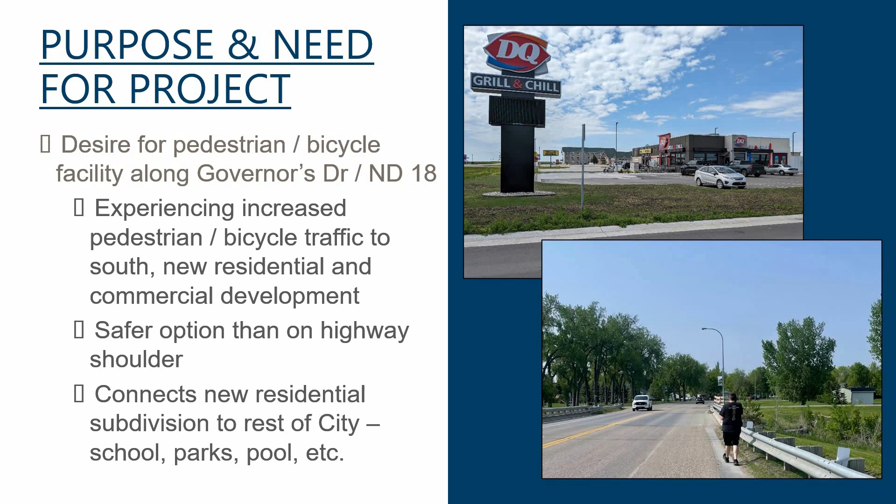This project, especially the bridge, connects the isolated new subdivision to the rest of the city's amenities, such as the school, public parks, and the pool. The project consists of a path along Governor's Drive from 37th Street Southeast to Cottonwood Drive. The planned route is shown to the right and crosses on the north between Cottonwood Drive and Morningside Drive, a pedestrian bridge over Swan Creek along the current highway bridge, and a crossing to the south near 37th Street Southeast.

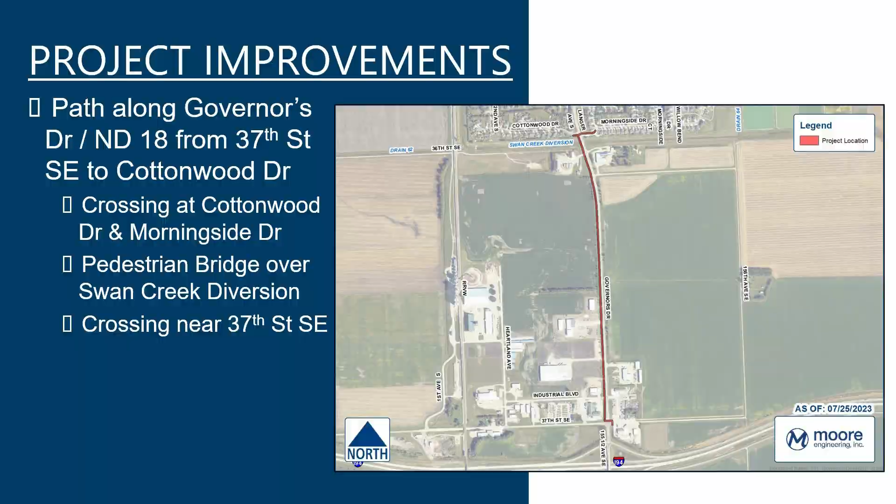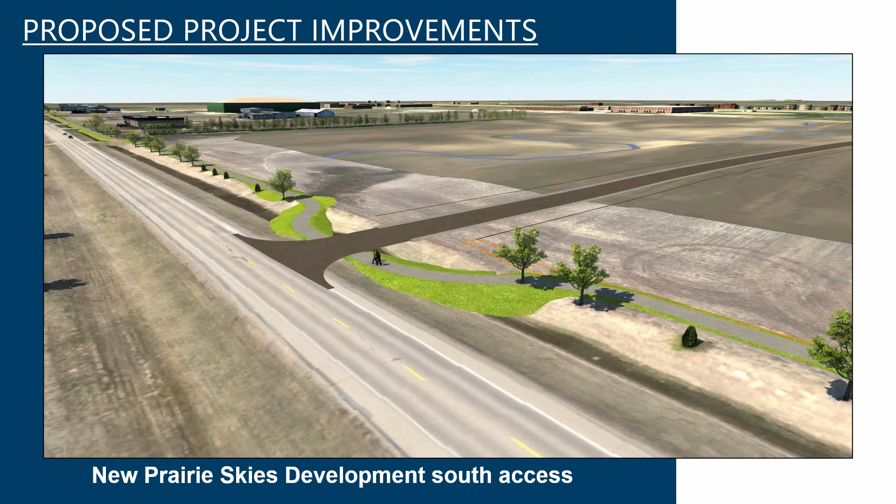The next few slides show renderings of the project, starting at the north with the crossing between Cottonwood Drive and Morningside Drive, along with the pedestrian bridge over Swan Creek. The next image is of the new Prairie Skies residential subdivision development, the north access along the new 13th Street along the highway. This is a south access into Prairie Skies on 11th Street within Prairie Skies.

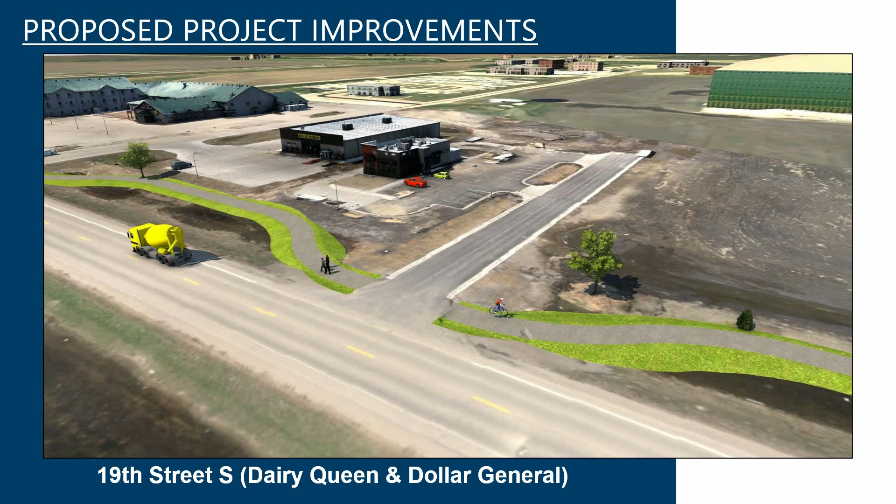Looking south down the path just north of S.J. Machine and Ace Hardware. This is 19th Street where the new Dairy Queen is located along with Dollar General next door. And last is the south end crossing between Governor's Inn Water Park and Gordy's Travel Plaza.

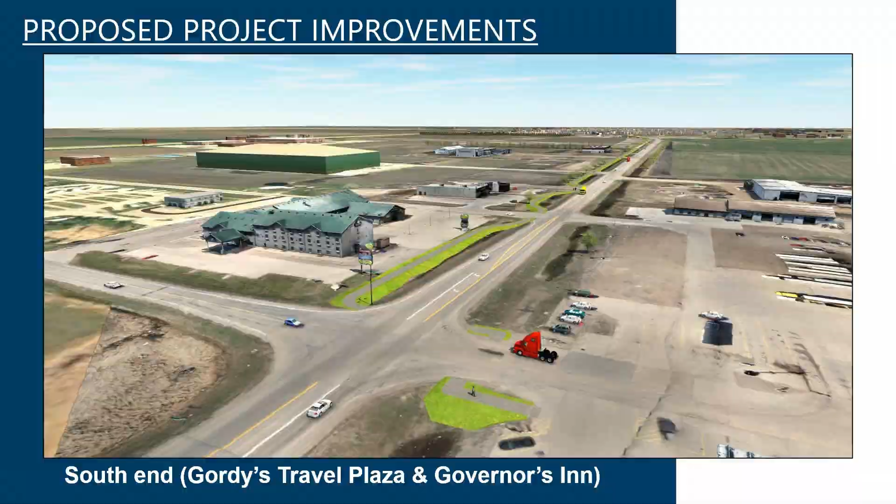For the pedestrian bridge, a separate prefabricated steel bridge on the west side of the current highway bridge has been selected. This location capitalizes on the existing retaining wall system, shortening the span distance, reducing the overall cost of the bridge. An option of adding on to the existing highway bridge was explored, but was far more expensive due to the required guardrail upgrades to current safety standards.

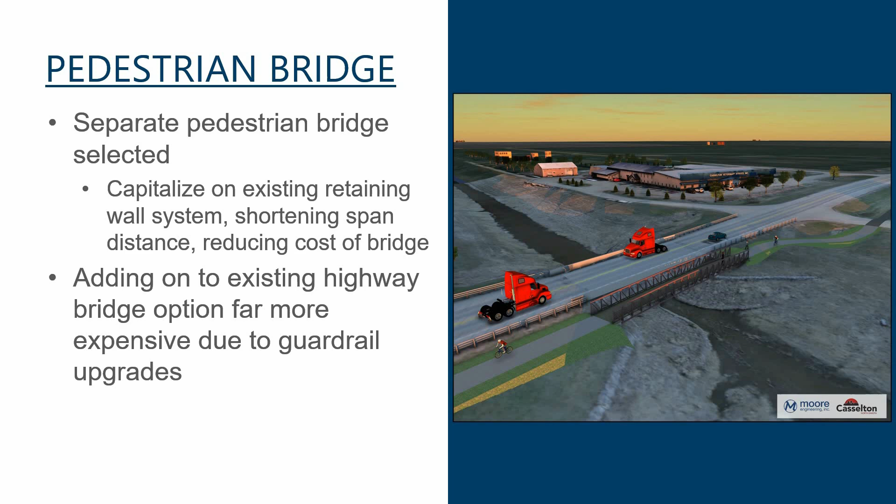The highway crossings at the north and the south ends of the project are proposed to include curb bump outs, which shorten crosswalk distances, reducing the exposure time in the roadway for pedestrians, therefore extending protection for the crossing pedestrians. The curb also provides a visual cue to drivers to slow down, leading to a safer crossing.

And lastly, the crossing is planned to include rectangular rapid flashing beacons, or RRFBs, that activate the flashing lights with a push button. The Federal Highway Administration research shows that RRFBs can increase motorist yielding rates to pedestrians up to 98%. The picture on the bottom left shows an example of RRFB crossing systems just to the west of Casselton in Mapleton on County Highway 11 through town.

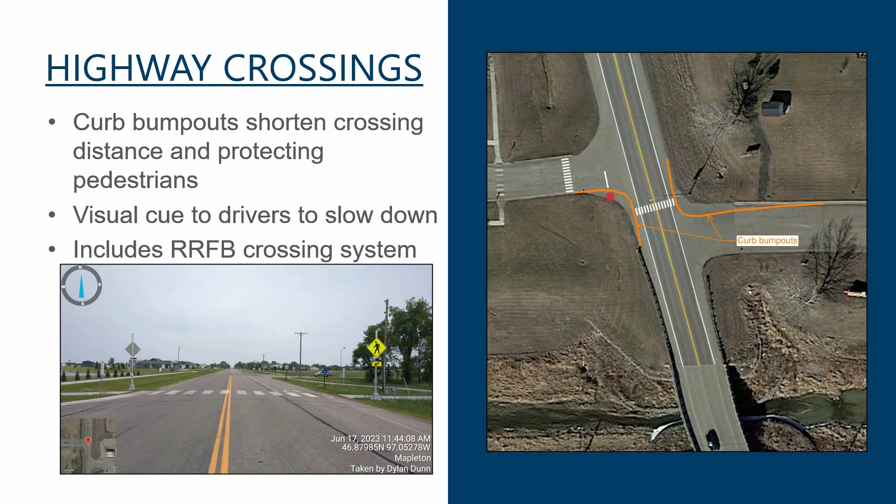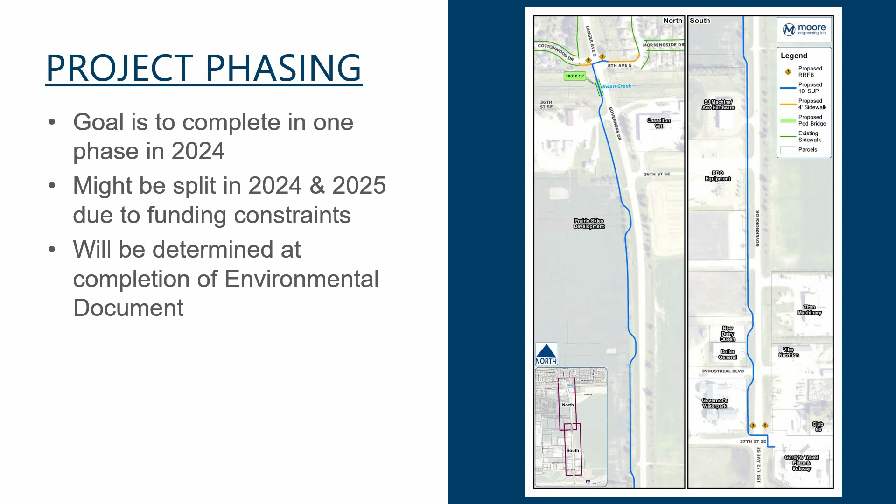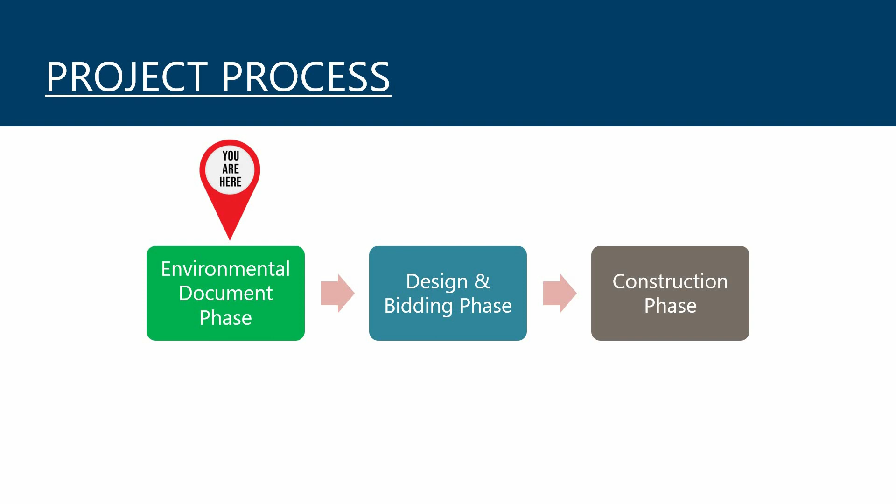As mentioned, this project is in the environmental document phase and anticipated to complete in early winter. The next phase of this project is final design and bidding, which timing will depend on decisions made within the environmental document phase. Lastly is construction phase, which could be in 2024 and/or 2025.

To follow the National Environmental Policy Act of 1969 and ensure all environmental components are explored and cleared, an environmental document is to be created. These components include a cultural resource inventory survey which returned no findings or impacts, threatened and endangered species involving reviewing the presence of any identified critical species affected by the work activities or proximity to protected habitats. All species identified as threatened or endangered were determined to be not present or not affected by the project.

A wetland delineation was performed within the project limits. Highway ditch wetlands were delineated and requested to be reviewed by the U.S. Army Corps of Engineers for any regulated wetland impacts or permitting. Right-of-way needs will be identified further into the design process.

Temporary construction easements along the path are anticipated for blending out the areas adjacent to the path along with maintaining current drainage patterns. No permanent features will be constructed on private property, and the areas disturbed will be returned to their original condition. Lastly, public input opportunities such as this public input meeting. The public has an opportunity to provide feedback and ask questions about the project.

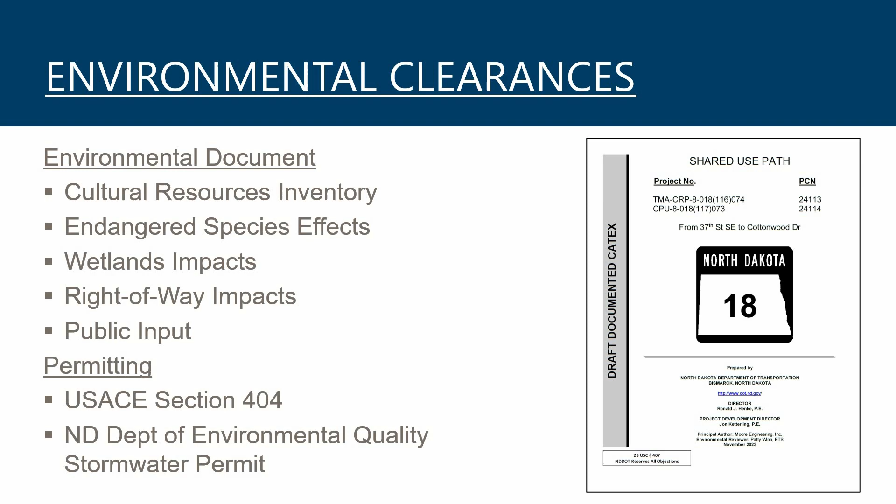A U.S. Army Corps of Engineers Section 404 permit may be required based on the results of the wetland delineation review. As with any construction project that disturbs more than 1 acre, a North Dakota Department of Environmental Quality stormwater permit would be required by the contractor before construction begins.

The current preliminary construction estimate is $2.1 million. The project has been awarded $755,000 in grants, $680,000 from the Federal Highway Administration's Carbon Reduction Program funding. $75,000 is from the Garrison Diversion Conservancy District Matching Recreation Grant. The City of Casselton is pursuing other grant opportunities to reduce the local share.

Written statements or comments may be submitted by November 17th to Dylan Dunn, Project Engineer at Moore Engineering at 925 10th Avenue East in West Fargo, or email it to dylan.dunn@mooreengineeringinc.com with public input meeting in the subject line.